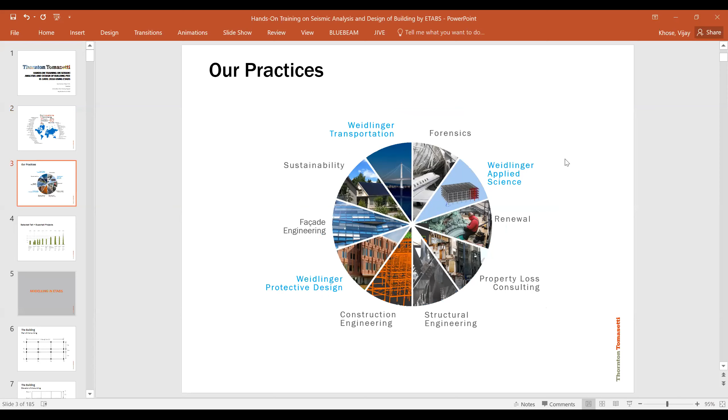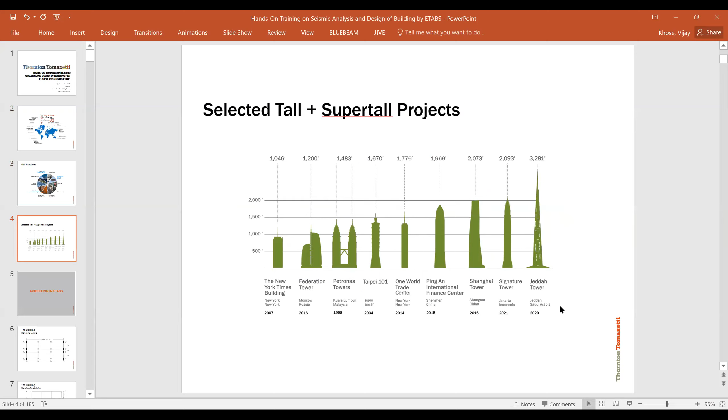So with this brief introduction, we can start with one problem. Here I have considered a 3 by 3 bay building for demonstration. The bay width in X direction is 5 meter, and in Y direction we have 3 meter, 2 meter, and 3 meter. The building is 4-story high, and 3.1 meter is the story height.

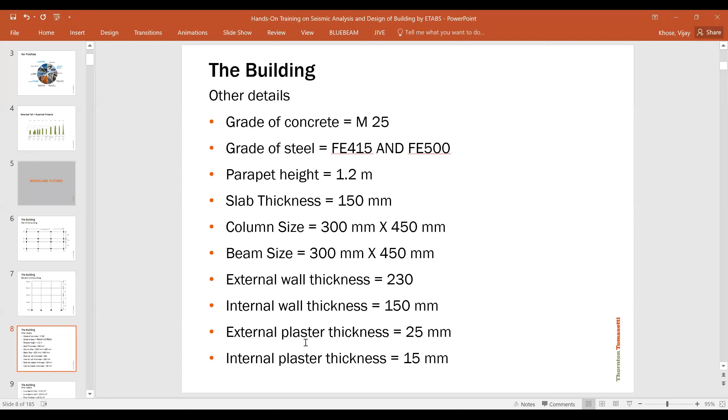Some details: grade of concrete is M25, grade of steel Fe415 and Fe500. For confinement steel we are going to use Fe415, and for other steel we are going to use Fe500. Parapet height is 1.2 meter. Slab thickness is 150 mm. Column size and beam size are both considered as 300 by 450 mm. External wall thickness is 230 mm, and internal wall thickness is 150 mm. It is assumed that the external plaster thickness is 25 mm and internal plaster thickness is 15 mm.

And live load: it is assumed that this is a residential building. So as per IS 875, the live load on the residential building is 2 kilonewton per meter square, and live load on the roof, considering the roof is accessible, is 1.5 kilonewton per meter square. Floor finishes: on floors we have some tiles and other finishes, so that is considered as 1.5 kilonewton per meter square.

It is also assumed that the building is located in seismic zone 3 and is resting on medium soil. And the importance factor is considered as 1. I will explain why we consider 1 in subsequent lectures. And one of the assumptions is that the building frame type is a special moment resisting frame.

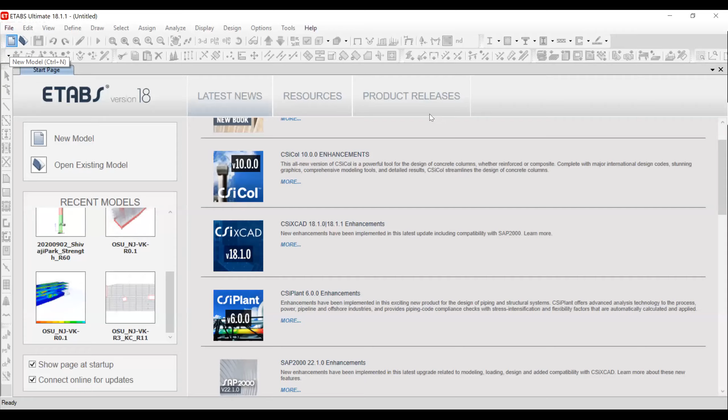So with this, we can start with ETABS. Let me share the ETABS screen. So here you can see the ETABS screen. Just go to File, or below that you have one icon, New Model. You can click on that. You will see one form where you have different options. You can save user default settings, so you can customize a setting and use it for your projects. For now, you can use this.

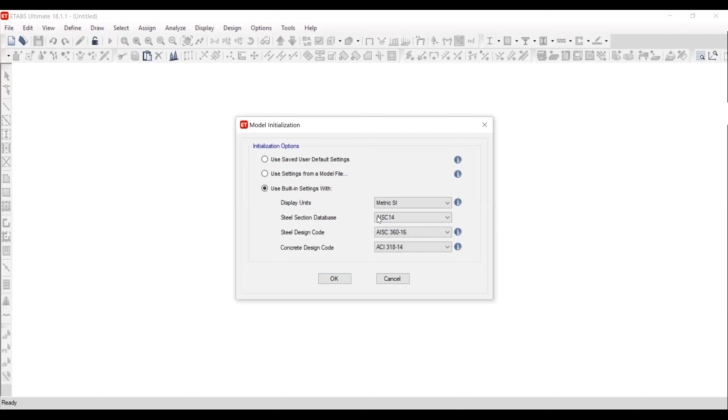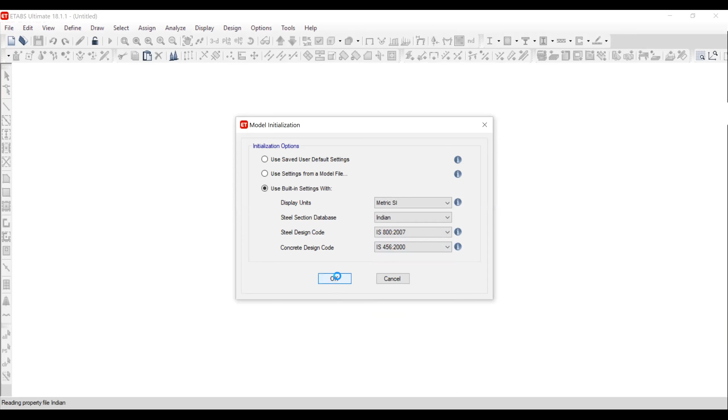Display unit, let us say Metric SI, and the steel section database. You have different databases for different codes. In our case, we can consider Indian, then steel code IS 800, and concrete code IS 456. You have to select this option initially. This will be the default for your model. So click OK.

Once you click here, you will get one form, New Model Quick Templates. Here you can see there are different templates. Depending on your requirement, you can select any one. For our problem, we can select either grid only or blank. Let us consider grid only. Here you can see the number of grid lines in X direction, Y direction, then spacing in X and Y direction, and here number of stories, typical story height and bottom story height.

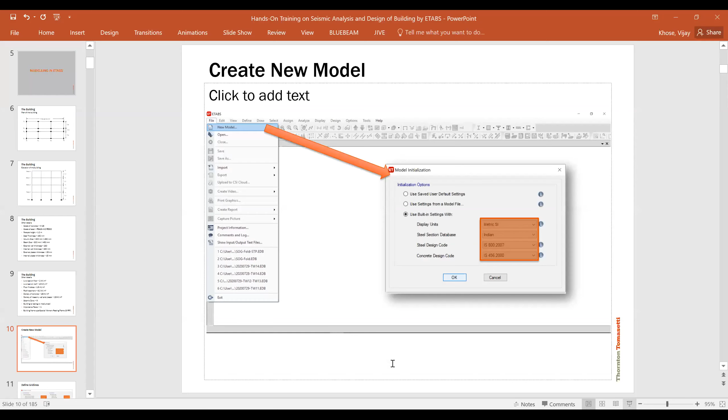Now, if you go to our problem, you will find the number of grid lines in X direction is 4, and the number of grid lines in Y direction is also 4. The spacing in X direction is 5 meter, and the spacing in Y direction is 3 meter, 3 meter, and 2 meter. The 3 meter is repeating, so we will consider 3 meter, and then we can edit this.

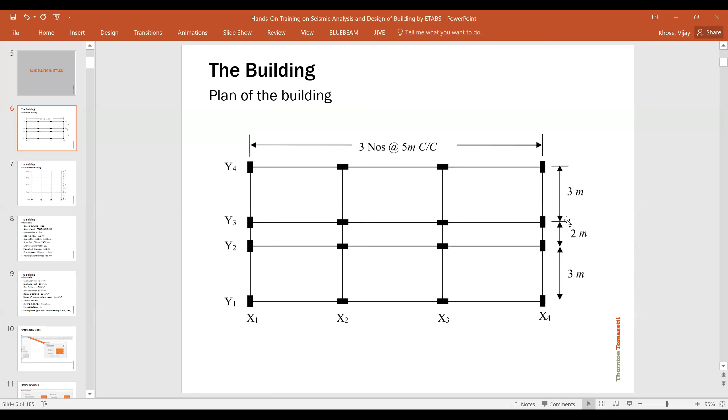If you see, for story height, we have 5 grid lines in Z direction. In ETABS, X and Y directions are horizontal axes, and Z axis is the vertical axis. The story height is 3.1 meter.

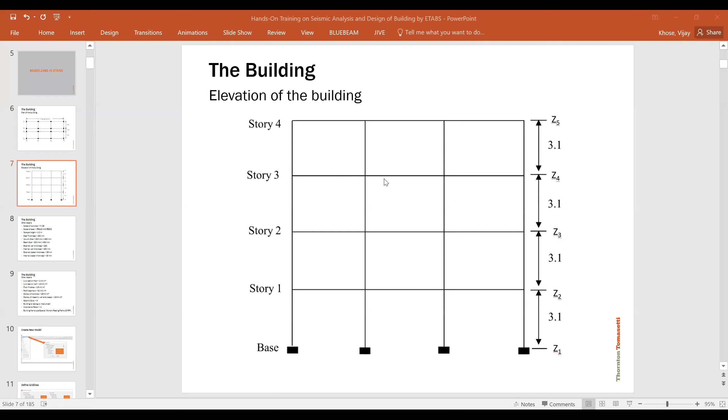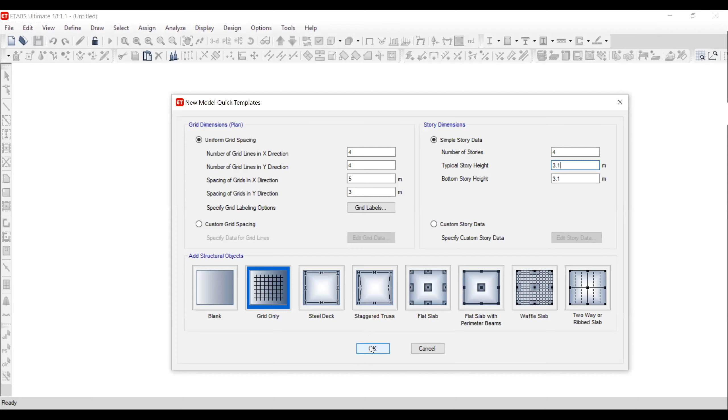If we go back to ETABS, the number of grid lines in X direction is 4, Y direction 4. The spacing of grids in X direction is 5 meter, and Y direction 3 meter. Then number of stories, 4 stories, the typical story height is 3.1 meter, and bottom story height is also 3.1 meter. Typically we have a taller bottom story, but we are considering all story heights the same. Once you select this, you will see the grid lines are generated here.

The spacing in X... Excuse me, sir. Hello. Yeah. Sir, you said top floors are 3.1 height. If they are of different heights, how should we select them? Bottom floor height is 3 meter, top floor height is 3.1. No, for this problem, top and bottom are both 3.1 meter. Okay. If all floor heights are different, sir? That I will show you.

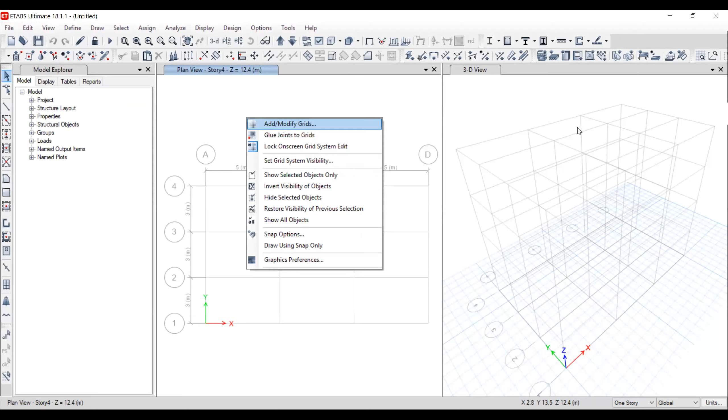Okay. What you have to do is right click here in the window, and there you will find Modify Story Data. Here you can see all heights are 3.1 meter. Whichever height is different, you can enter here. Let us say the first story height is 4.2 meter. Then these heights are automatically changing. So whatever your height is, you can specify. Each story can have a different height.

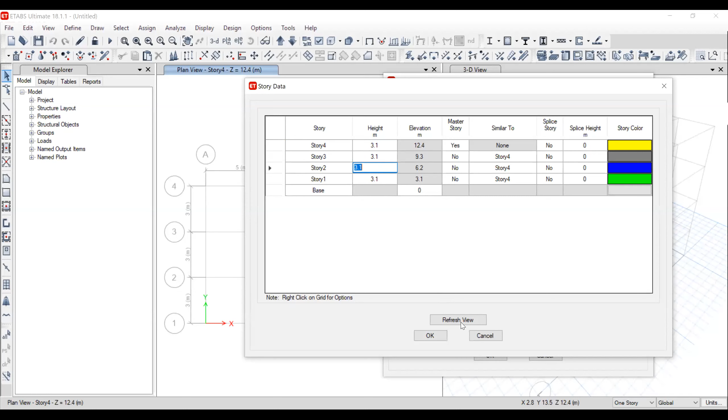Okay. So you can enter 3.1 meter. Okay. So refresh. Okay. So this was about the height.

The other thing is we can also modify the grid lines. So you just click here, modify grid line. And here we have two options: display grid data as ordinate or display grid data as spacing. Now this is as ordinate. So you select spacing. In X direction, our spacing is constant, 5 meter, 5 meter, 5 meter. In Y direction, our first spacing was 3 meter and second spacing was 2 meter.

So you can click this. Here we can change any grid spacing also. Excuse me, sir. Yeah, here we can change any spacing. You can change any spacing, no issues at all.

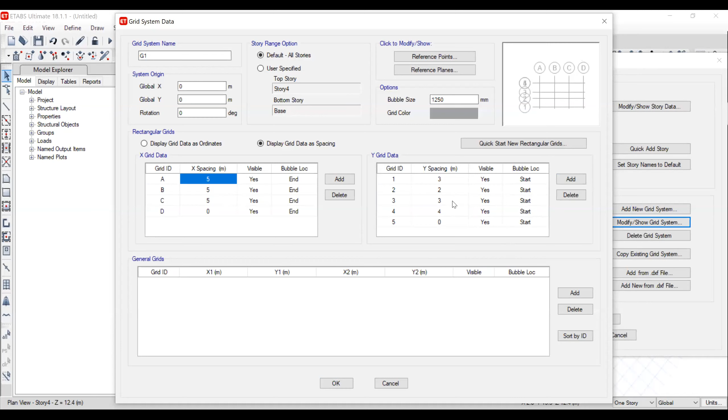Okay. So here you can also add a grid line. Click on add. Here you can add more spacing, more grid lines also. Let us say I am doing 4 meter here. So click OK. Sir, if I want to delete any specific grid, is that possible? How do I delete that? Yeah, that is possible, I will show you.

So here you can see I have added one grid with 4 meter spacing. Now I can right click here and again go here, and I want to delete this grid line. So simply click on that and delete. But you have to ensure that the spacing is correct, because earlier there was 4 meter and 3 meter, so now the spacing is 7 meter. So you can just change that to whatever spacing you want. Okay.

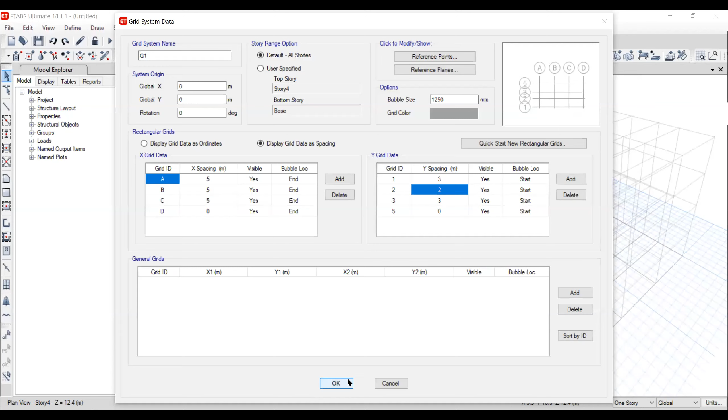So now you can see your spacing is 3 meter, 2 meter, 3 meter and 5 meter in X direction. Now here you can see different tabs like file, edit, view, define, draw, and on the left hand side you can see different tools you can use to draw or do modeling. Here also you have some tools, some buttons. So you can use either these tabs, or if you are more conversant with the software, later you can use these buttons also.

So the first task is to define material properties. We have assumed M25 grade of concrete. So you can click here, and ETABS has provided different material properties based on the region. So for India, material type is concrete, and the grade of concrete is M25. Click OK. Here you can see in this form the material property data. The material name is M25, material type is concrete, and the weight per unit volume is 25, as we assumed.

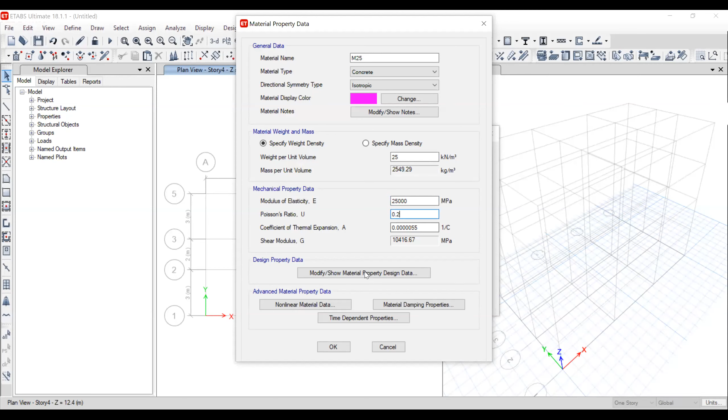So here, design property data, you can see M25, and the concrete cube compressive strength FCK is 25 MPa. In case you are not using these ETABS defined properties, you can create your own properties and enter them here.

So the next material is rebar. Here you can see we have steel and we have rebar, but we have to select rebar for concrete reinforcement. For reinforcement, we have to use rebar. Steel is basically when you are using structural steel sections like I section or channel section. In that case we can select steel. Otherwise, we select rebar for concrete reinforcement.

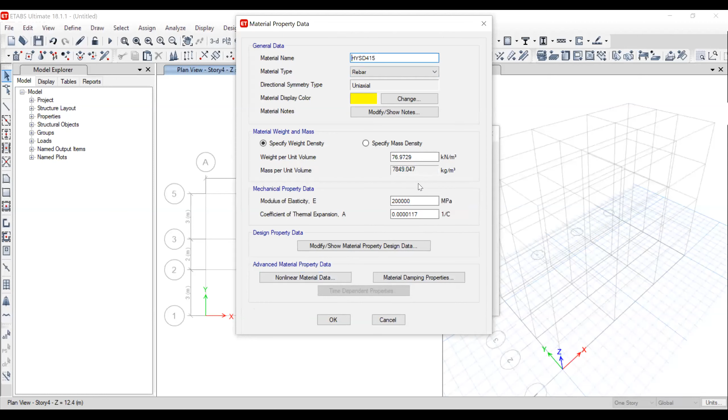So here also we have some properties, like one is Fe415. So you can add. You can check whether all properties are correct or not. And here you can see Fy is 415. Then we can add one more material, that is Fe500. Here you can see its properties. Okay, so the two material properties for reinforcement and one for concrete are defined.

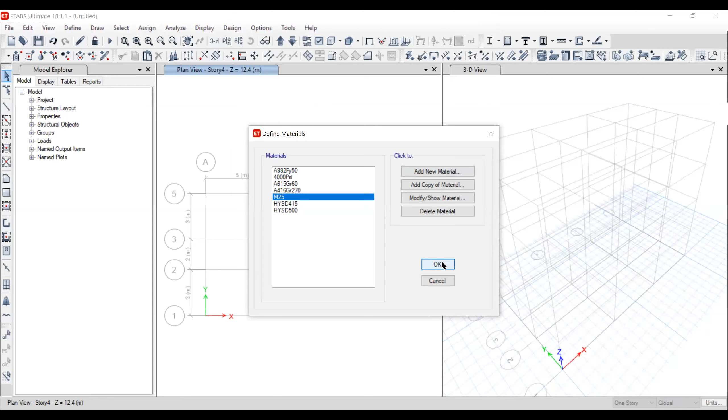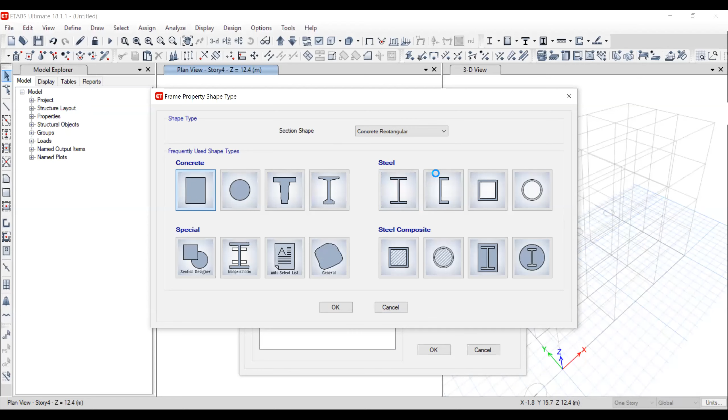Okay, the next one is to define section properties. So in section properties, we had two properties, one is column and the other is beam. So here you can say add new property, concrete rectangular. You can define other materials also, some special sections also. And here we can consider concrete rectangular.

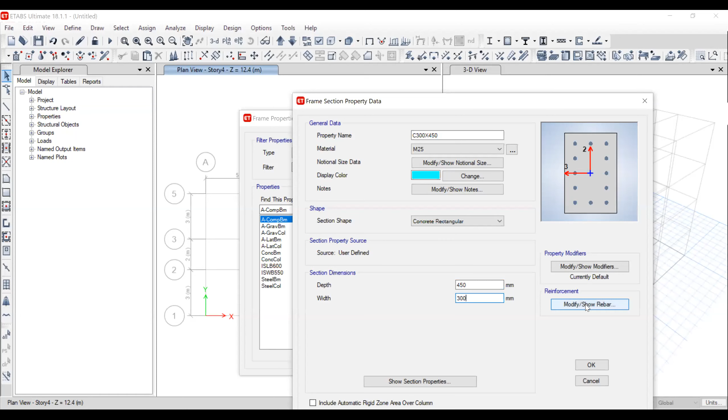Here let us say column 300 by 450, and then material is M25. Okay, and the width is 300 and depth is 450. Then you can click on the reinforcement. Here you can see in design type you have two options, one is column and the other is beam. In column we are considering axial force, major moment and minor moment.

And we can select the reinforcement configuration, circular or rectangular. In our case, it's rectangular. If for some reason we are selecting circular, then we have two options for confinement, one is ties and the other is spiral. The longitudinal bars, as we said, are 500, and confinement is 415. The clear cover to confinement bar is 40 mm. This depends on your exposure condition from IS 456, so you can select the appropriate cover. Here we are considering 40 mm.

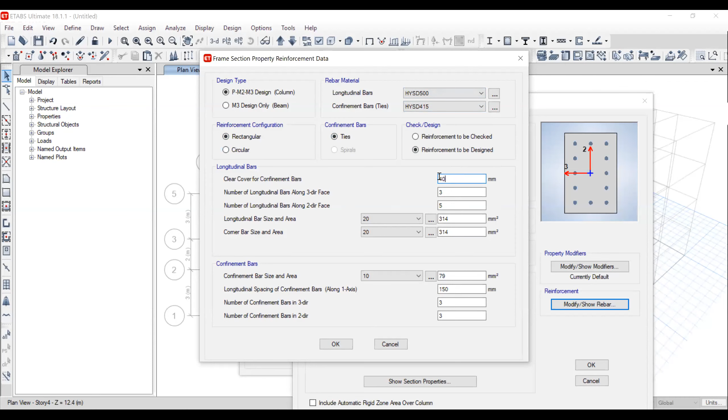Then the number of longitudinal bars along the 3 direction face and number of longitudinal bars along the 2 direction face. Here you can see these are local axes. This is local axis 2, that is vertical, and local axis 3 is horizontal in this screen. And local axis 1 is along the length. So along the 3 direction you can see 1, 2 and 3 bars. And along the 2 direction you can see 1, 2, 3, 4, 5 bars.

So basically I am just demonstrating that if you want to provide the actual number of bars that you are providing, you can input it here. And then the longitudinal bar you can also select here, whatever different diameters are provided, and the confinement bar diameter and spacing, and also the number of bars. If you are providing ties, for the number of confinement bars in 3 direction, let us say 1, 2 and 3. And in 2 direction also we can provide 1, 2 or 3, whatever number of bars you are actually providing.

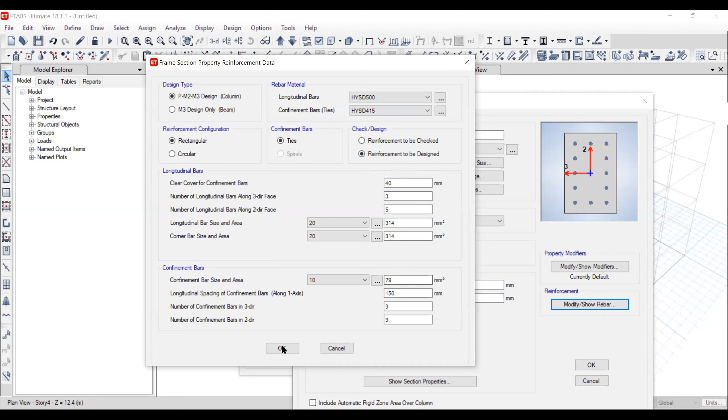Similarly, we can define for beam also. Here you can say B 300 by 450. Grade of concrete is M25. Width is 300, depth is 450. Then reinforcement: in design type, you can select M3 design only, beam. The basic difference between beam and column is that in column we are considering axial force, minor moment and major moment, whereas in beam we are considering only major moment. There is no minor moment and axial force. That's why it is important to select whether it's column or beam.

Longitudinal bar grade is Fe 500 and confinement bar is 415. And the cover to longitudinal rebar group centroid means we have to provide the effective cover. Let us say we have 25 mm clear cover, then 10 mm is your confinement bar, and the reinforcement you are providing, let us say 25 mm. In that case, your effective cover will be 25 divided by 2 plus 10 plus 25, so around 47.5.

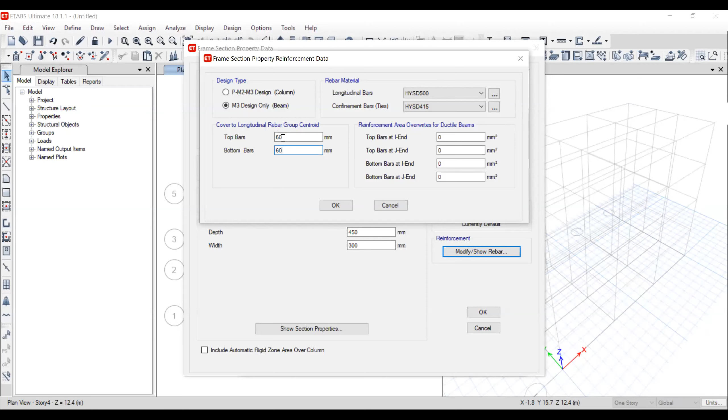So depending on your requirement, you can provide it, or you can provide on the conservative side. Let us say you are providing reinforcement in 2 layers, then your effective cover will be different. Currently I am assuming the reinforcement is in 2 layers, and I am considering the effective cover as 60 mm. Okay, so we have defined column size and beam size.

The next one is slab. Go to define section properties, slab section. Here you can see there is one slab definition by default, and you can modify it. Let us say slab 150, grade of concrete is M25, and I am considering this as membrane, and the thickness is 150. A slab you can define either by shell thin or membrane. Generally for a raft, if it is very thick, then we use shell thick.

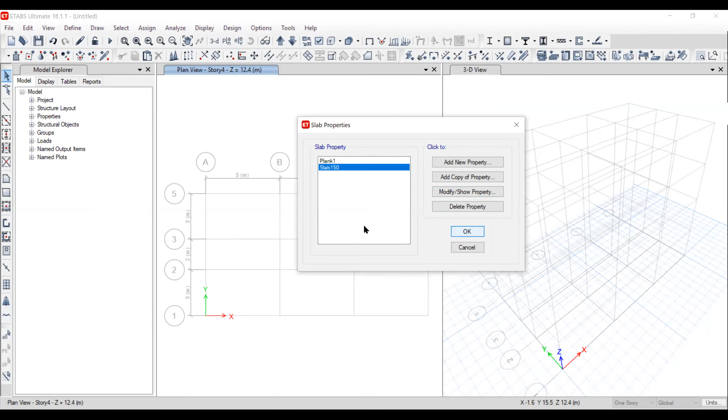So I am considering a membrane. Okay. So our material properties definition and frame section properties definition are done. So next task is to draw the columns and beams.

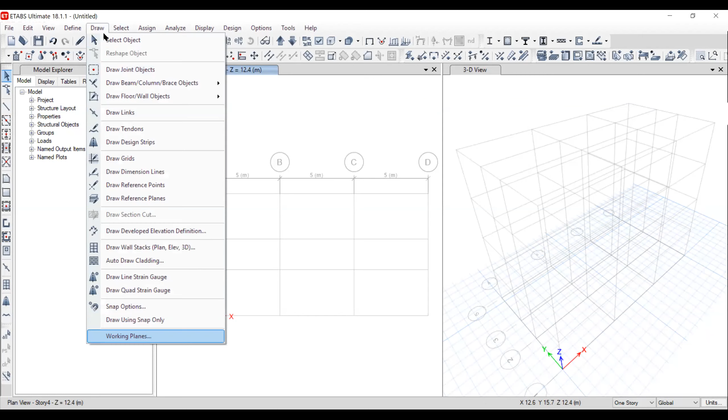So here on left hand side, you can see there are different buttons, and otherwise you can see here there is a draw toolbar. So draw tab. So there you can see. So if you want to draw a joint, draw beams, then walls, or even you can draw tendons for PT slab and design strips. So whatever you want to draw, you will find in this. So and here some buttons are also provided.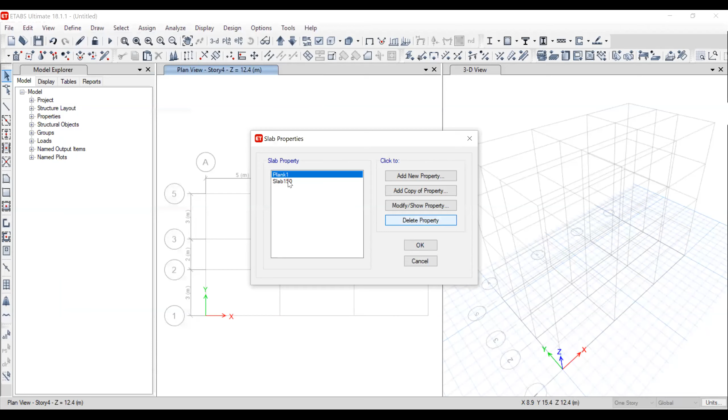So there was one question like, can you explain about include automatic rigid zone area over column in frame section property data wizard? Okay. Sorry. So here we have one option in column like include automatic rigid zone area over columns.

Actually, the thing is when we are doing modeling in ETABS, we are considering column as a line element. Okay, and we are connecting it with slab at one location. So that will be like a point. So in reality, the connection between slab and column will not be a point connection. There will be like an area connection. So column has some definite size. So here it is assumed that it is like point connection, but in reality it is not. So if you want to consider that effect, you can include this, like include automatic rigid zone over column.

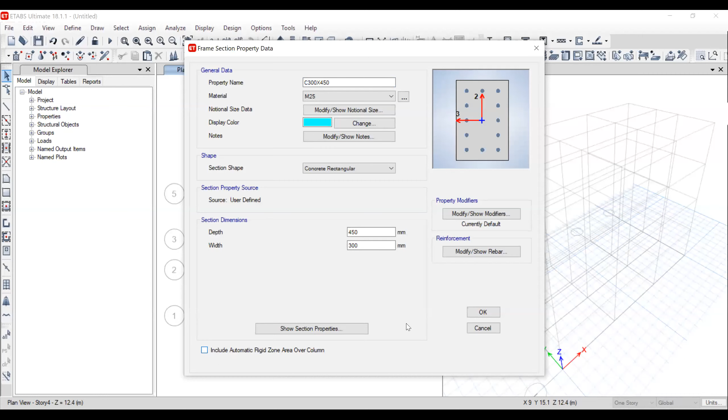Okay, so what I was telling, here you can see there are different toolbars, draw beams. So here you click on this. And here you can see properties of object, the type of line is frame, then property type. So we have just defined this as beam, then moment release, continuous. Yes, we are considering continuous beam. And the plan offset, we are not considering any offset. So wherever we click, the beam will be drawn on that point. If you consider some offset, then the beam will be drawn at the offsets we are providing here, and line drawing type we are considering straight here. And we are not taking any control.

So here we have different options. Like we can draw for certain length, we can draw at certain angle. Then we can do parallel only in X direction or only in Y direction. Those options are there. But for now, we are not considering anything. So drawing control type will be none. So here, once you select this and selected appropriate properties and options, you have to draw on a node. So it will draw beam there. So just go on clicking. And on right hand side, you can see in 3D view that beam is getting drawn. Okay, so this is one option.

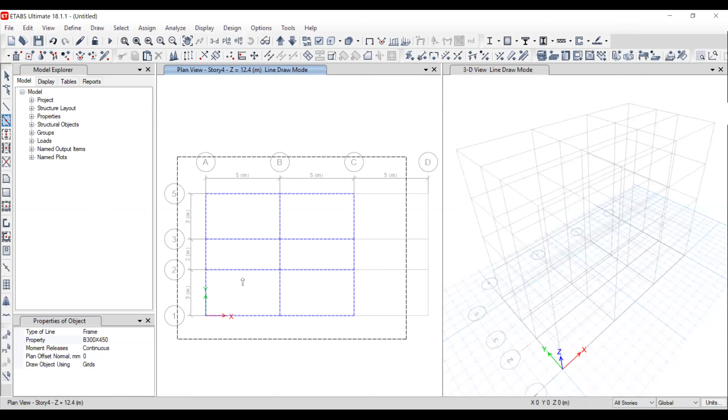Now here you can see there is one option at the bottom right. Here there is one story, all stories, or similar story. So if you select this all stories option, whatever you are doing will be done on all stories. Now let us do it again. So this is beam. Okay, now you just select this. So you can see the beams are drawn on all the levels. Okay, so we can reduce our time in drawing this.

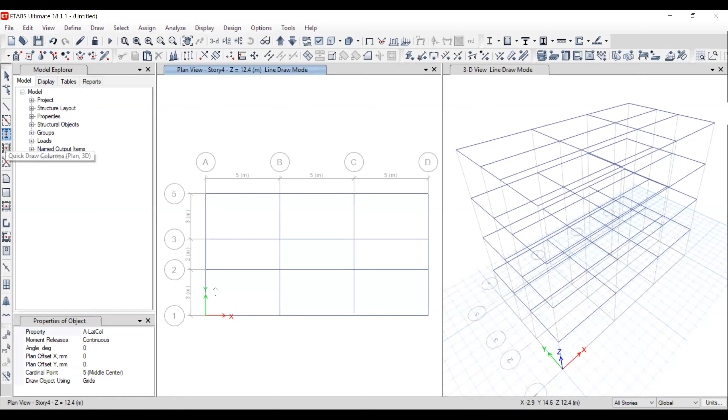So there are different options. You can draw on one story, you can draw on all stories. And if you define your grid lines correctly, you can simply drag and you can see all beams are drawn. So the next option is column. So you can select column. Okay. And for column also you can click like this. So you can see all the columns are drawn.

Okay, so now we have to ensure that whatever we have drawn is correct or not. You can go here, and here you can see general view options, what you want to view - whether joint objects, visible or invisible, columns, beams, braces, floors, walls. Different options are here. And here special items - you can see story levels you want to see, dimension lines, architectural plan layers.

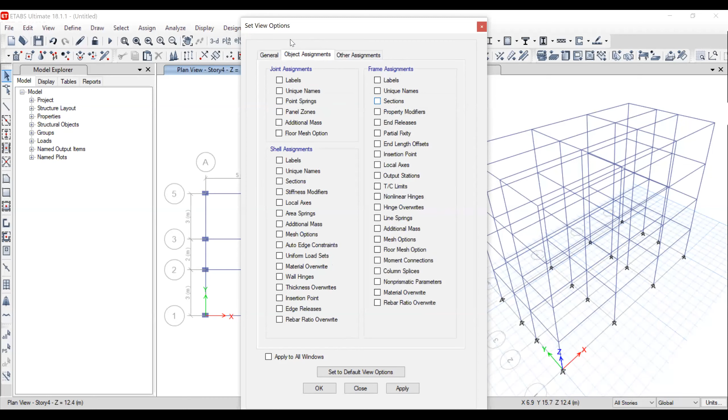We can even import the architectural plan on the background and draw columns and beams using the architectural background. For object assignments, in frame assignments, just click on sections and hit apply. Now here you can see what beam properties are assigned. For beams, B300 by 450 is assigned.

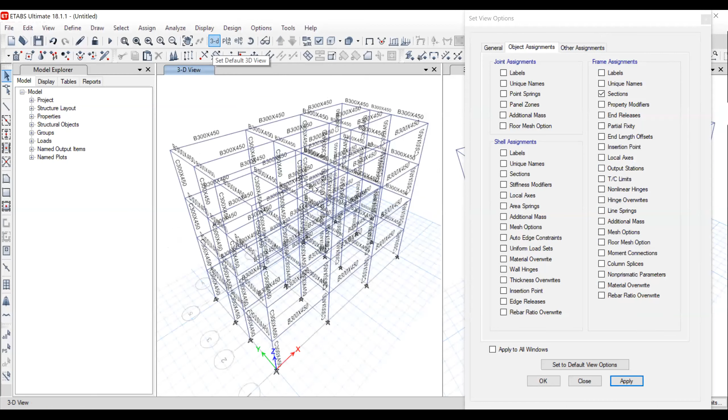You can also change view - here you have a button, click 3D, then you can click on plan. So you can toggle between different levels, using this move down or move up button. You can see in plan view, it's showing the story number and elevation of that story. You can just toggle up and down.

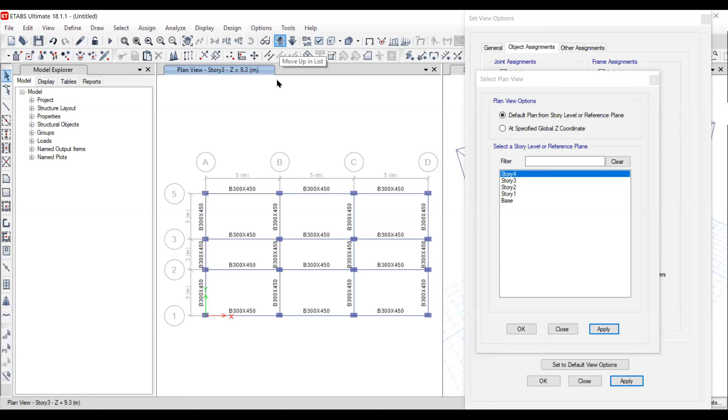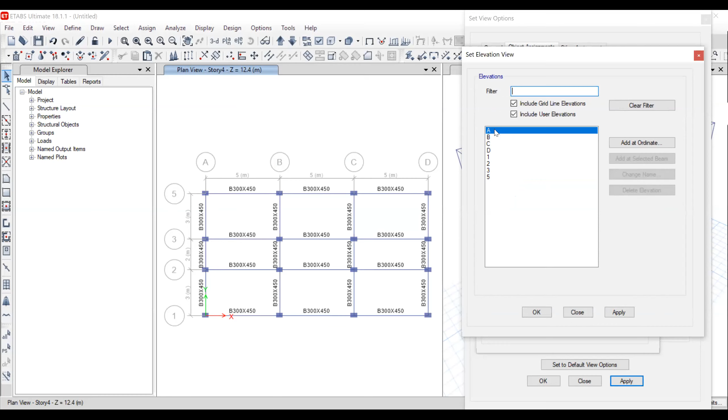You can move to any level you want. You can also see the elevations - elevations are automatically created based on the grid lines. You can see A, B, C, D, and 1, 2, 3, 5. These elevations are on the grid line. You can select that particular elevation and hit apply.

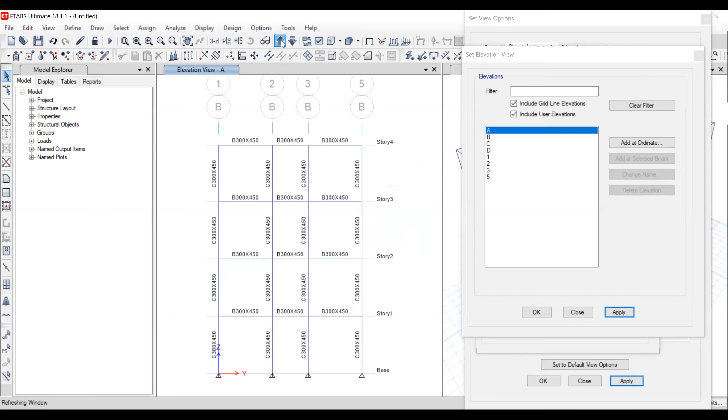Now in elevation, we can see the columns - the section property for column is C300 by 450, for all columns. You can also toggle between the levels. Now you're on B grid line. Here you can see elevation view, C grid, then D, and then you can see on grid 1 your elevation. So like that you can see.

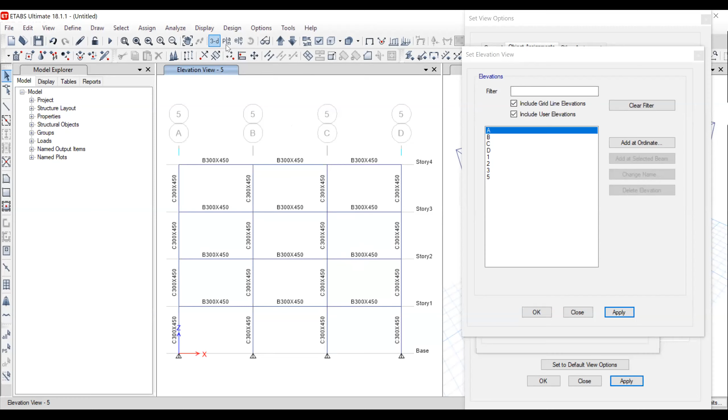Everywhere you can see we have assigned the correct material properties. Now you can again go to plan, and then let me select level 4. So next one is to draw the slabs.

Here in slab also we have different options for how to draw it. So here the first option, you can select this - click on the points, nodes. So you can draw slab like this.

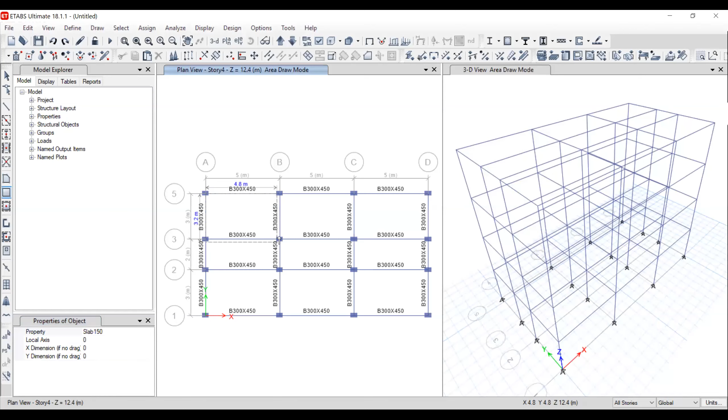The other option is, before drawing slab, we have to select the slab properties - for if we are doing anything, we have to select the property first. Then the other option is to draw rectangular - you have to select two corners, and you can draw it. On the right hand side, you can see on every story it's drawing, because we have selected all stories.

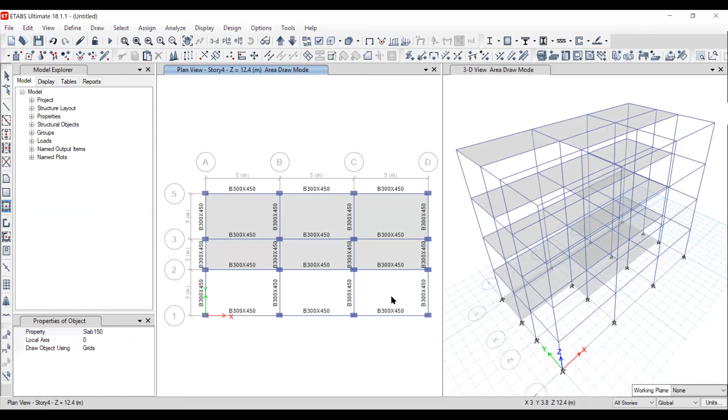Other option is quick draw - you select this option and simply click between the grid lines, so the slab is automatically drawn. Okay, so all slabs are drawn.

Now we can go to base level. Here on base level also the slab is drawn, so we don't require that on the base level, so we have to delete this. But since we have selected all stories, all stories are selected.

So what we have to do - on the left hand side you will see some options like 'all'. If you click this, all slabs will be selected. Then previous view will be selected. If you click this, you can clear all this. So now I am changing story to one story, selecting this, and deleting this. Now you can see only one level's slab is deleted.

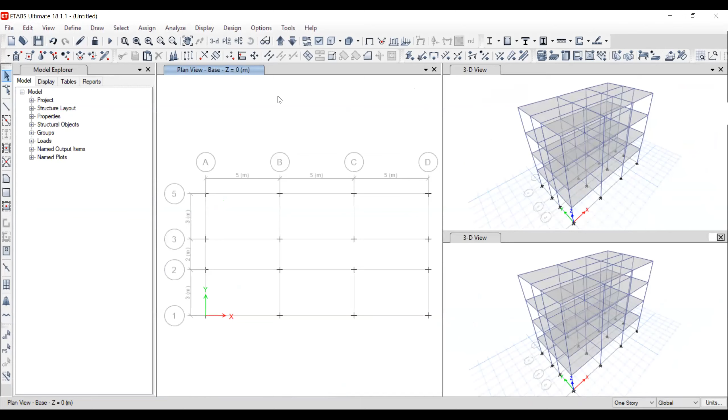Also here we can see two windows. At any given time, we should have at least one window open. If you want to add any window, simply click here and add new window. So you can add, and you can see arrange windows - you can also arrange the windows. If you want to close that window, simply click here, and that window will be deleted automatically.

Until this, if you have any question regarding modeling of the geometry, let me know.

Hello, sir. Yeah. Sir, if the width of the column is not equal to the width of the beam, then how to adjust the column position, sir? The center line will be changed, no, sir? Yeah, center line will be all changed. So in that case, okay, let me show you.

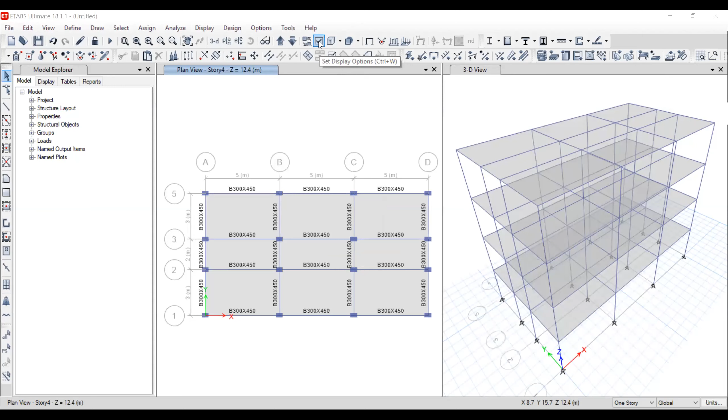Like mostly okay, the edges column, sir. Yeah, I got your point. I am trying to demonstrate you, just a minute. So okay, here sir, you can see that set display option.

Switch off other things. Okay, yes. So now, oh sorry, so all columns I am seeing. So what I am doing, I am going to change these columns, I mean I am going to rotate these columns. So okay, let us say...

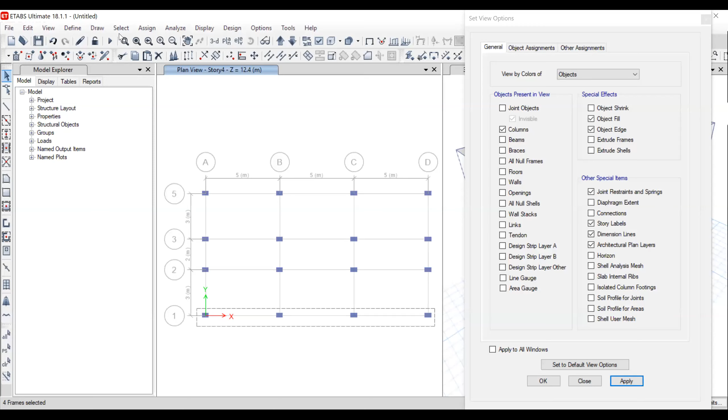Assign frame in the local axis. So I am going to change this to 90 degrees. Okay, now you can see.

Now you want to take this beam to the edge of the column, right sir? Right, edge of the column.

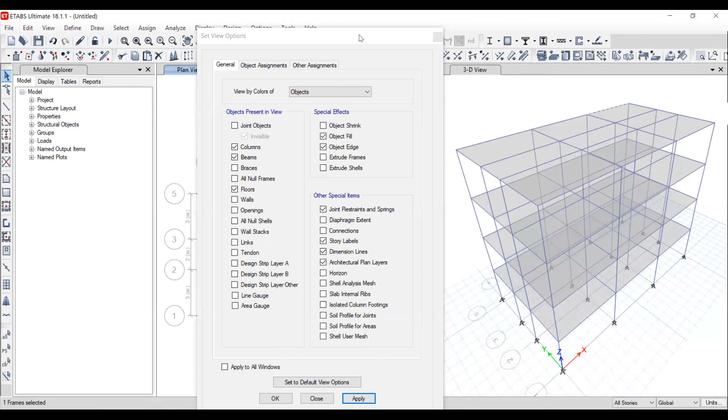So now you can select all stories and you can select this. Okay, go to assign frame and the insertion point. You go there. Okay.

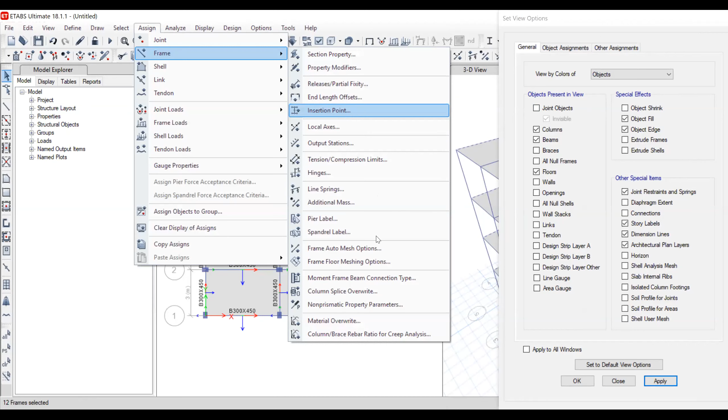So our depth of column is 450 mm and width is 300. So the center of now, currently they are at center. So how much we need to move them so that the edge will be aligned? 75 mm, right? Okay, sir. So here you can enter like 75 mm and 75 mm.

So end I and J. So the one end, like the first node is called I and the second node is called J. Okay, so here we have two options like local coordinates or global coordinates.

So global coordinate will be with respect to X and Y. So here you can see this is the 0,0 coordinate, where you can see this axis X and Y. So here let us say we take global coordinate. So X is this and Y is this. So we have to change it to Y. Let us say 75 mm.

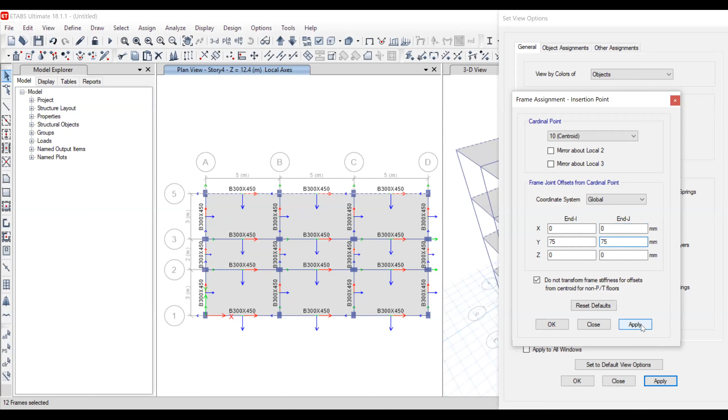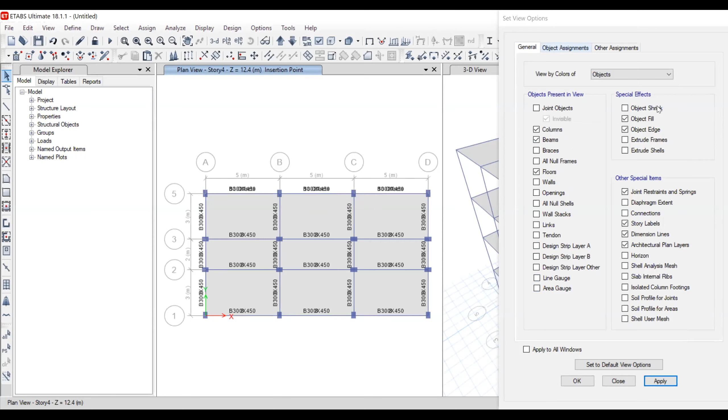And you can hit apply. So this is moved now. Okay sir, but it's not showing us. Yeah, yeah, so here the first thing is here you can see like there is the offset. So the other thing, what we can...

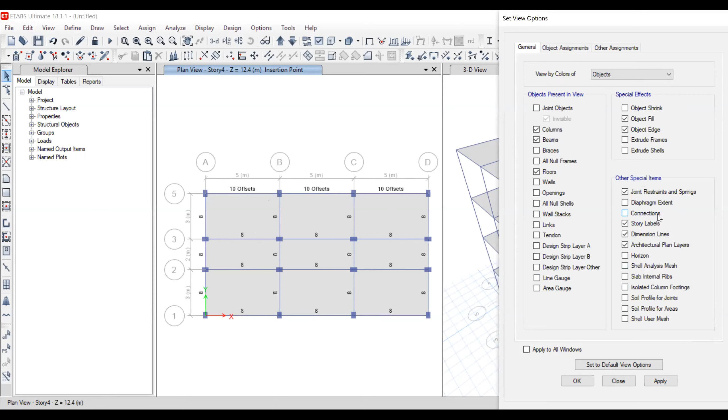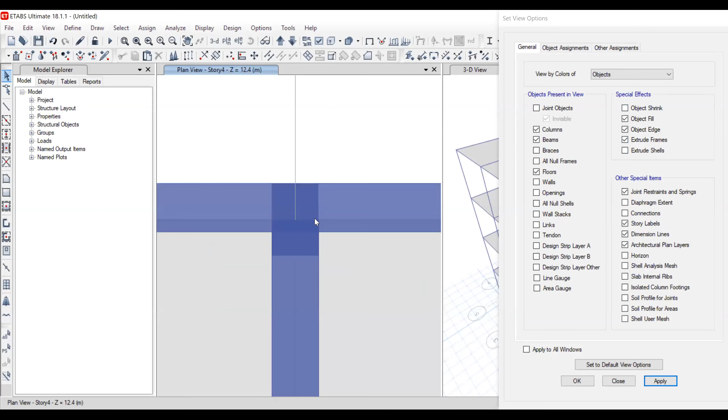Extrude frames. See now you can see. If you extrude this, you can see here. Yeah, yeah, this. Okay sir, my one question is, sir, either this one is correct or the before one is correct, sir, for designing.

Like, do we have to set this or not? No, no, actually you have to take a call. So if this, see now this eccentricity is very important in the design of columns. Okay, if you can do this, that is great.

So that is more accurate. So currently, whatever I was showing, we were not considering eccentricity, because if your beams are aligned at the edge of columns, it's not sitting concentrically on the columns. So in the earlier case, we were not considering the eccentricity, and if you are not considering eccentricity, the columns will not be designed for that. So wherever possible, you can always consider that.

Okay, sir, okay. Okay, sir, okay. So any other question? Please proceed. Excuse me, sir.

Hello, yeah, tell me. While drawing slab, you mentioned about one-way slab. Do we have to mention the slab as one-way, or will it calculate and describe it as one-way automatically, sir?

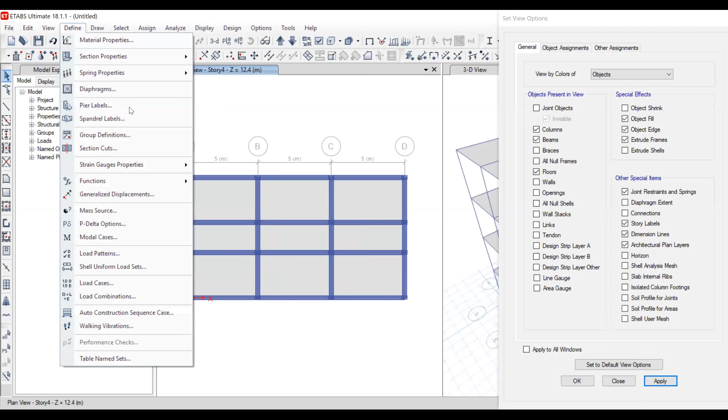Yeah, so here, while defining, if you can see in slab sections, you have an option here. So 'use special one-way load distribution.' So if you select this, then it will be a one-way slab.

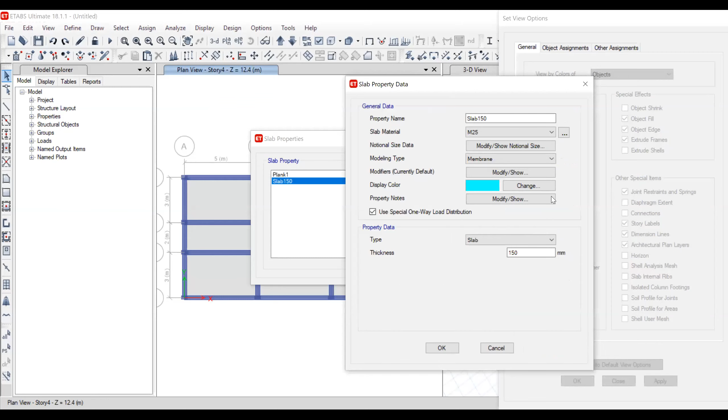Okay, for example, here now, this panel you can always model as a one-way slab. So this corridor between two grids, like this 2 meter by 5 meters, these can be qualified as a one-way slab.

So you can define one-way slab. So if you want to define one-way slab, you can simply select this, like 'use special one-way load distribution.' Okay, so then the slab will be a one-way slab.

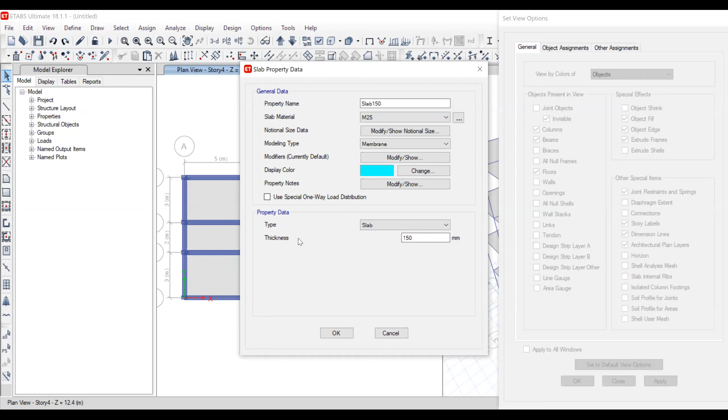If we deselect that option, it means it is two-way slab, sir. If you are not clicking this, so by default it is two-way slab. Thank you. Okay, so there was one more question.

So in case of secondary beam, should we break the beam at the junction of beams, or should we design the primary beam continuous up to the column junction?

First thing I would like to tell is whether you break it or not, that beam will be designed as continuous. If there is a secondary beam here, you will still have continuity whether you break it or not. The continuity will be decided based on the support condition you are providing. Let me show you what I can do.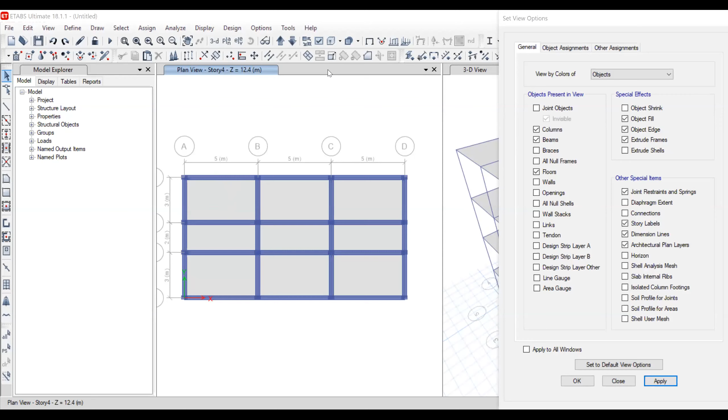Let us say in this way I have a secondary beam, so we can also draw the secondary beams. Here the number of beams, let us say we have one beam. So you click here, so this is defined, that one beam we have defined.

Now if you go here, in the frame assignments, if you see end releases, this end release is assigned here. This secondary beam we have considered pin here. But if you see here, there is no pin condition here.

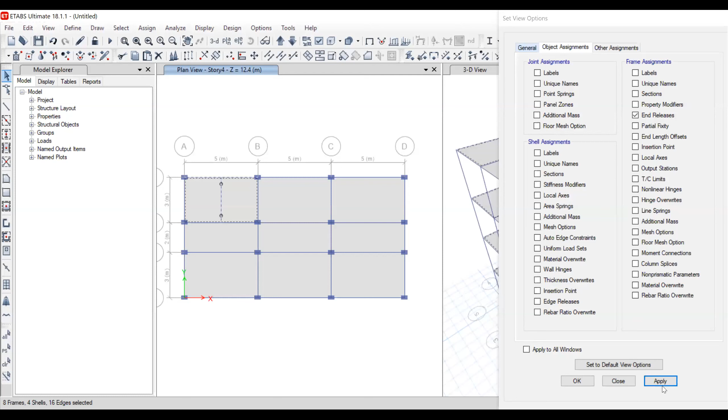This can be done other way also, that is what I think was your question. Here you can see points, you can select this, go to edit, and edit frames. Now you can see this is one beam, this is another beam, but it doesn't make any difference, because unless you are providing any support condition here, it will be considered as one continuous beam only. So did I answer your question?

Hello? Yes, sir, please continue. Yeah, okay.

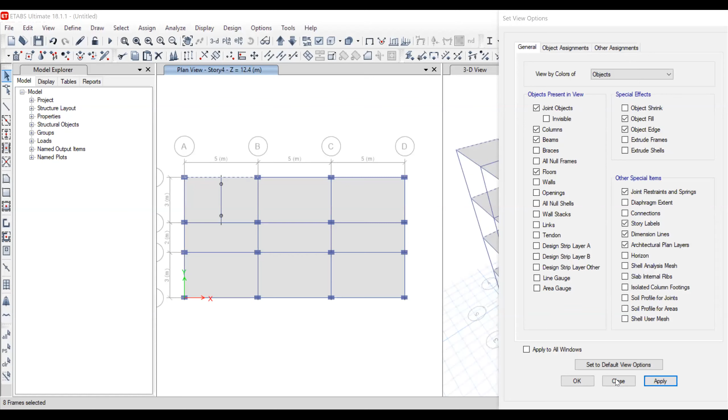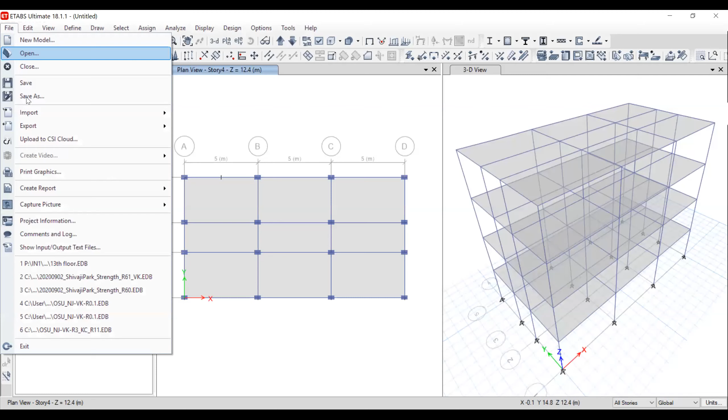Okay, then we can do file save as, so we can save this model.

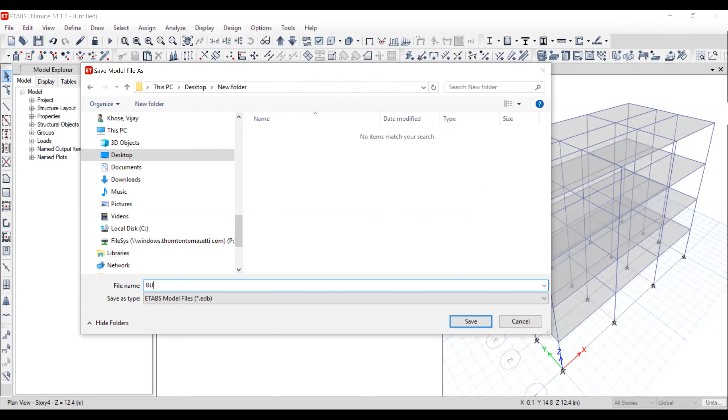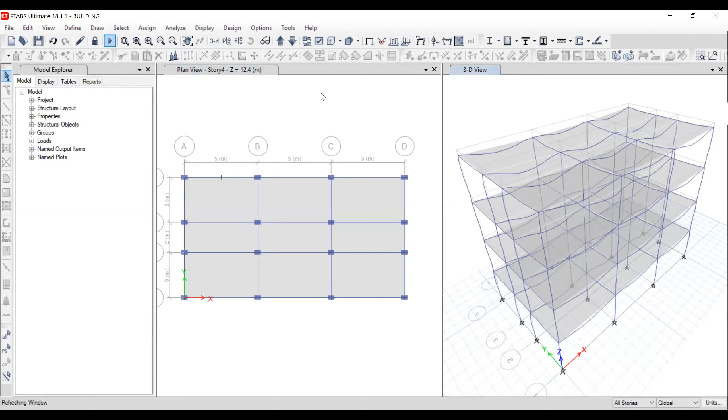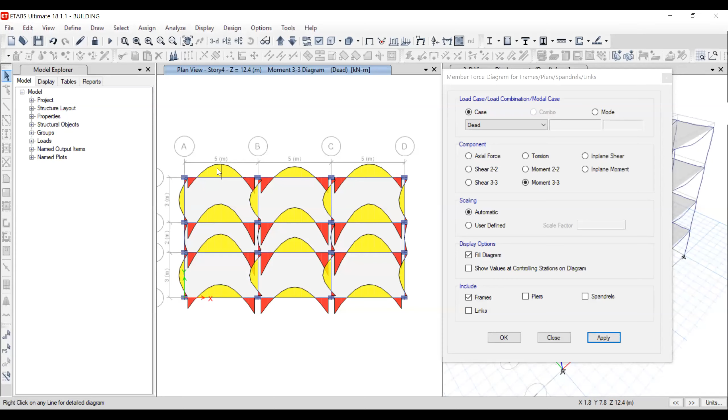Okay, then let us run this model. Now if you see the moment here, you can see this is a separate beam and this is a separate beam, so there is a node in between, but this is not making any difference whether you break it. I can break this into a number of pieces, but you can see there is no change in the behavior of the beam. So breaking into a number of beams is not going to change your behavior.

Okay, so the next step is to apply load. For applying loads, what we have to do is define the load patterns.

You can see here, currently we are going to concentrate only on gravity loads. In gravity loads, we have self weight. Self weight is the weight of the elements, like we have defined slab, columns and beams, so that self weight will be calculated automatically. Other is superimposed dead load, SDL, then live load and roof live load.

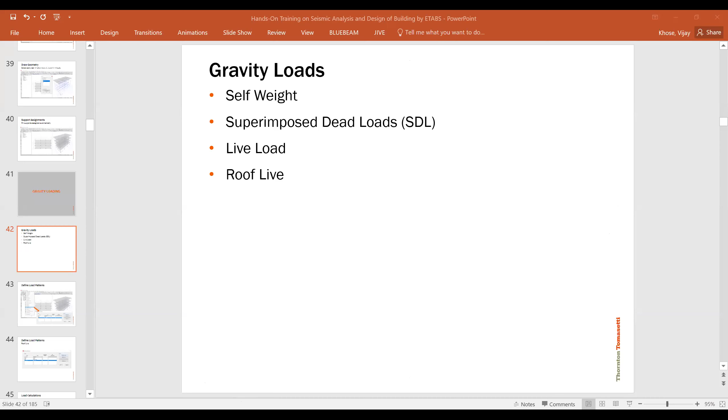So we can define this. Go to define load pattern, and you can see here there are two load patterns by default, that is dead, and dead has self weight multiplier as 1. So in whichever case you consider self weight multiplier as 1, the self weight of the elements is considered automatically. In other cases, you can see the self weight multiplier is 0, so there the self weight of the element is not considered. So the first case is self weight.

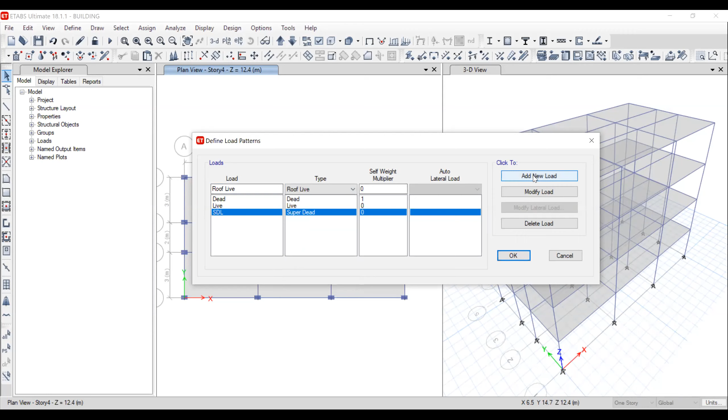Other case, let us say SDL, and type we can select super dead and add new load. Next one is live load, that is already defined, and we can define one more roof live, and in type we can say roof live and add new load. So with this, we have defined the load pattern.

So I am done for the day. If you have any question, you can ask. In the next session, we can see how this gravity load can be applied, and then we can validate the model whether whatever we have modeled is correct or not. So let me know if you have any question.